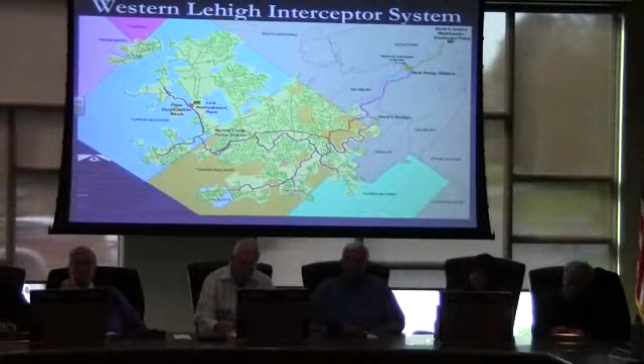Today we're going to first see the presentation on the EPA AO. Presenting will be Jim Shelton, who has been our program consultant ever since we first received the AO. Then after, we will have the 537 plan presentation. We have Bill Bonner, who works for Arrow, and with Bill is also Ralph Eshborn, who works for AECOM and is part of the Arrow team. He'll present the findings for the 537.

But before we actually get to the presentation, I wanted to take a few minutes to go over a system overview, so that everybody understands our system, the board and the public as well.

If you'll refer to the screen, this is the Western Lehigh Interceptor system. This main pipe system is the interceptor system that LCA owns. It takes the flows from all the communities from the western portion of the county to the eastern portion of the county. We also have two pump stations.

This one we use in dry weather and wet weather to bypass this area of the interceptor system. We also have a little relief system that goes from Keck's Bridge down to Park Pump Station, which we use during wet weather. The Allentown piping system goes this way, and the Kline's Island wastewater plant is here, with a direct discharge to the Lehigh River. Our pretreatment plant, for everyone's understanding, is on the upstream portion of the system.

LCA only owns this interceptor system, which has pipes ranging in size from 18 inches to 36 inches. But these are the collector systems, and this is where the actual sewage flow and the majority of the I&I comes from. So flowing into our interceptor is a portion of Low Hill, Weisenberg, Upper Macungie, Lower Macungie, Alburtis, Macungie, and Upper Milford.

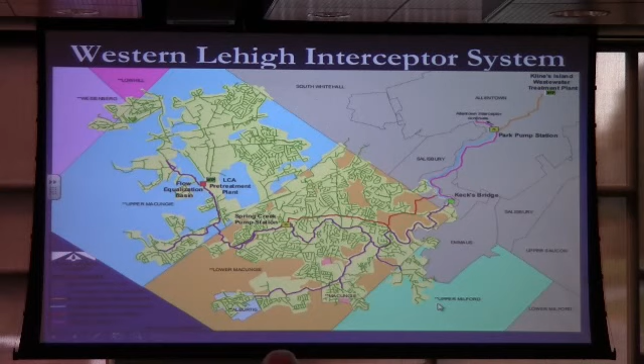So again, the sewage flows come from the collector systems. This is a map showing the findings from our I&I study done in 2009, where we had flow meters in to measure all the individual sewer basins, down to the little sewer basin level. This is basically the basis of all the analysis we have done so far.

The color coding represents a ranking of how bad the I&I is. The reds and oranges are pretty much the worst. There are different ways to do an analysis - this is RDII, another way measured by linear feet. It might look a little different, but it gives the consultants a general idea of where the worst problems are.

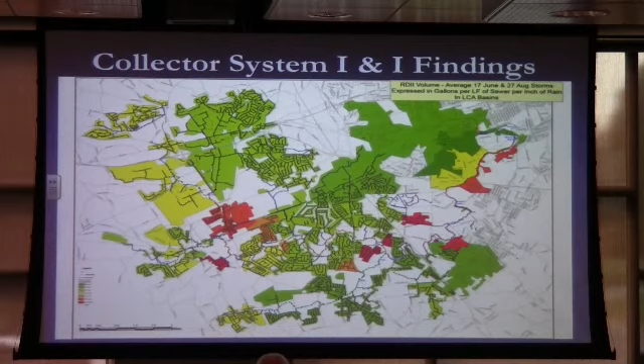This gives you an idea of the sources of infiltration and inflow. Studies have indicated that 50 to 75% of I&I actually comes from private property - homes, businesses in those collector systems owned by the other municipalities. You can get it from roof drains, clean-outs, broken laterals, foundation drains, and sometimes sump pumps in the home - that's on the private side. On the public side, you might have cracks in the pipe, roots in the pipe, and a cross connection with the storm sewer.

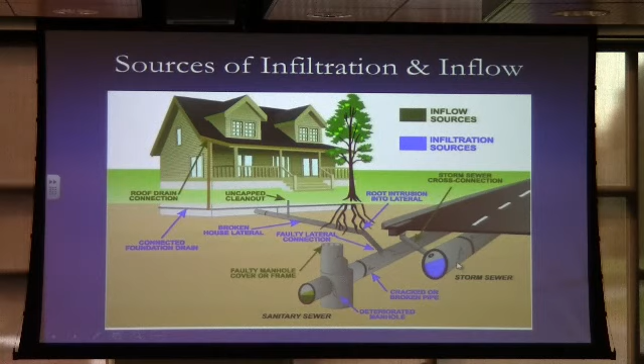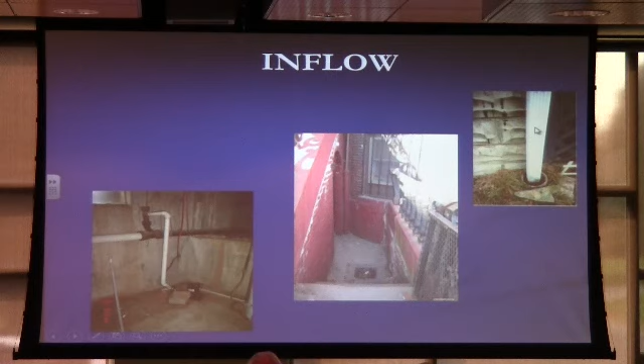This is showing some examples of inflow on the private property side - this is a sump pump drain at the bottom of a basement that goes directly into the sanitary sewer, and this is a roof leader. That's another roof leader.

Inflow: old brick manholes can let rainwater in. You can also have areas where storm water doesn't drain away very well, so that water ends up getting into the sanitary system.

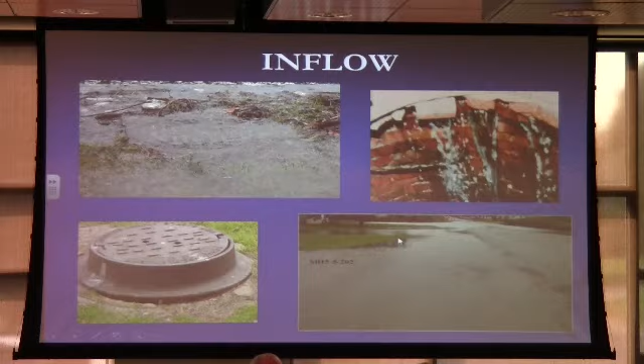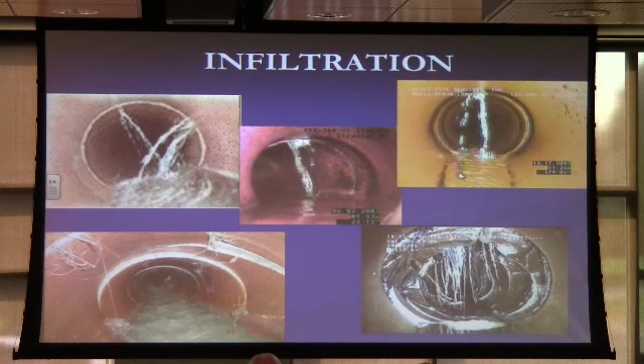Infiltration in the collector pipes can come from leaking joints, broken pipe, root intrusion, and other defects that allow water to get in. This can occur in the collector pipe or in the Western Lehigh interceptor. This is just showing some manholes.

You have groundwater getting into the manholes through some old manholes that may leak or are deteriorated. Again, a lot of these issues would be something you'd see in the collector system.

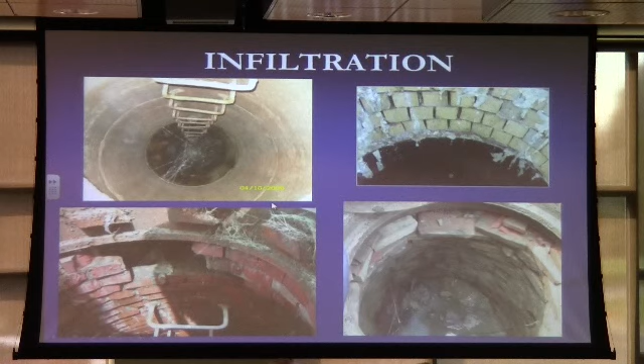Just to let you know what LCA has been doing to the pipe that we own — and again, we only own the interceptor pipe — we've done a physical condition assessment of the entire Western Lehigh interceptor. We put TV cameras in, took pictures, and our consultant did an evaluation. We also inspected every single manhole along the way. In 2016, we will be evaluating the Park force main and the Spring Creek force main.

What we have planned this year is test and seal, a rehab method where we inject grout into all the leaking joints along the pipeline. This will be done in the areas that are blocked off, and we anticipate the rest of the interceptor will get test and seal in another year or so. LCA is actively looking at infiltration in our own pipe system, but all of the municipalities are generally trying to work on their own systems too.

That's where the majority— can I ask a quick question? I know much of the capital budget involves routine maintenance over time. Is there a systematic year-over-year approach for I&I and all these things we routinely do to try to prevent problems from happening?

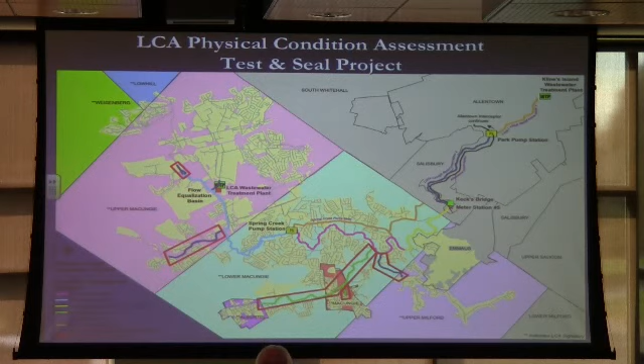One last thing LCA has done: in 2010 we constructed a flow equalization basin located at our pretreatment plant. It holds wet weather flow so it doesn't go down to Klein's Island during a rainstorm — we hold it and discharge it later that day or when the flows have come down.

LCA has spent a considerable amount of money and continues to spend money, and the individual signatories or other communities are in the same boat — they have to try and make improvements to their own systems.

I have a question, Pat — do we have any idea what percentage of the total I&I in the Western Lehigh Interceptor system is coming from the signatory collectors versus the LCA main? We don't have any method of determining that based on flow meters, so there's no hard data because of the way the meters are put in. Experience tells us though that 90+% is coming from the collection system, probably close to 95%.

Think of it in terms of the opportunity for it — we've got 252 miles of pipes in our system, and the Western Lehigh Interceptor is only about 20 miles of that, so the bulk of it is collector lines. In addition, you'd double or triple that for all the laterals that come off. So the vast majority of the footage isn't related to what LCA owns — it's related to what LCA services.

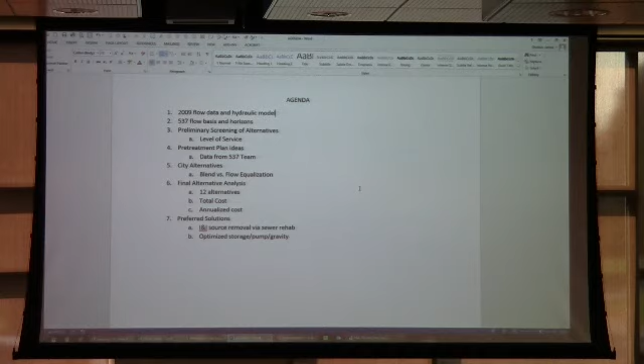While we were doing that, the city of Allentown, who's also party to the AO, the primary party to the AO, was conducting a similar analysis with their team headed by Whitney Reckwine. They built a model, used data from 2008, and developed a phase 1 corrective action plan that looked at 10 alternatives based on 2008 flow only.

They recognized as they started to discuss and collaborate with us that they needed to roll in their future flows. In the course of collaborating with us, getting the 537 flows and moving into phase 2, they now have a model that looks at wet weather flows in 2040 flows. And we've been collaborating with them on solutions.

We're in the final alternative analysis stage now, which breaks out into 3 rounds. We're just at the end of round 2 now. They're at the same point. We've been going in tandem with each other, meeting at the program management level monthly, and with the detailed engineering teams at the end of each round. We have a meeting tomorrow with their engineering team to share results. These are collaborative efforts to make sure that Allentown doesn't go left and we go right.

And we're to the point now where we're actually collaborating in a very synergistic manner right now. All of their alternatives right now are built around what they call bounding studies. Coming out of our preliminary screening of alternatives, we had 2 ends of the spectrum.

One, pound the flow at them - don't do anything, don't hold it up, don't remove it. So that's the high flow. And then we had one that said, hold up as much as possible - that's the low flow. They've used those 2 bounding studies to size what they would need to do at Klein's Island and come up with their own cost estimates. I'll show you what those are in a minute.

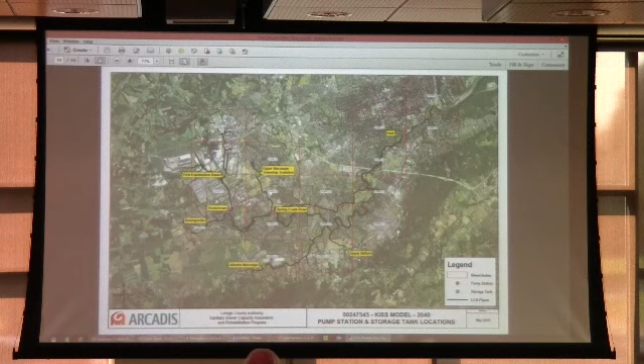Do you have a time you want to break? Or do you want to finish his? Yeah, we're going to continue to the end. Go. Yeah. Good? Okay, we'll leave later. Okay, okay.

Just a figure - this, I didn't know Pat had her figure, but I think everybody knows where everything is. We built 12 alternatives. And actually, I'm going to show you a different sheet real quick. I'm going to go over my cheat sheet first.

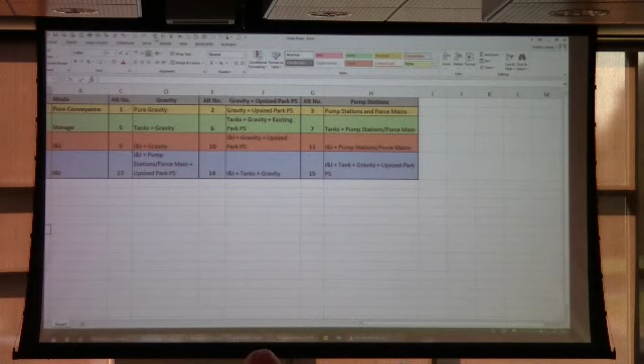Okay, so 12 alternatives in our final alternative analysis. They broke out, as I said, into these modes. You've got a pure conveyance series of alternatives. You've got, that's the yellow, you've got what's primarily a storage piece that looked at storage first, and then what we needed to do to convey what couldn't be stored. And then the orange and the blue are I&I driven pieces.

I should say, let's go get the leakage in the system first. And then from there, figure out what we need to do with regard to storage, pump stations, force mains, gravity lines, that type of thing. So those are the 12 alternatives we have.

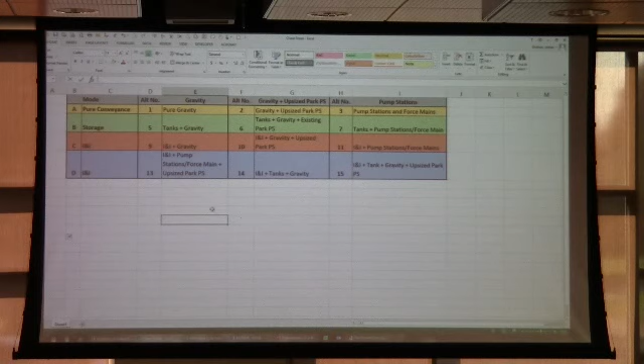So just to start putting things in numbers, I'm going to put up a cost sheet for you in a minute. But in round numbers, the total cost of that solution is $228 million. That does not include our portion of the Allentown piece. So just to start giving you some idea of the numbers we're dealing with.

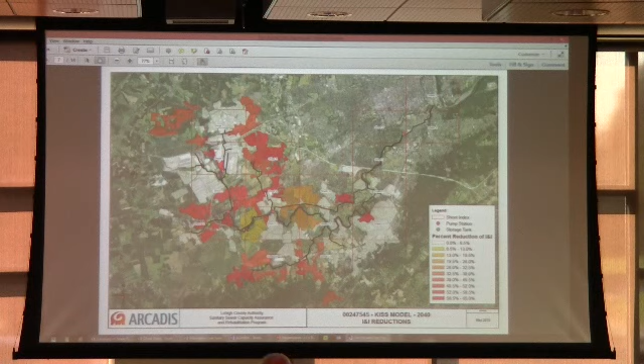This map shows you where the leaks come from and what I&I reductions you might get out of the different first, second, and third priority areas. If you do that, following that same logic, so 9, 10, and 11 are similar to what we had for 1, 2, and 3. It just has I&I reduction in it.

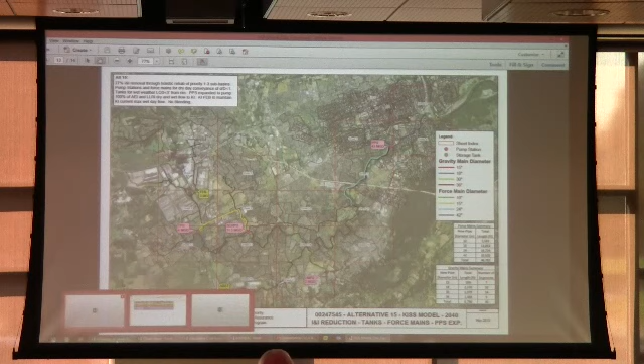And 13, 14, and 15 were all variations on these. Let's put a tank in here, it's a gravity line. Let's put a tank in here and upsize this. Let's put a tank here and a pump station here. So it basically was just playing with each of the little pieces, seeing what changes we could and couldn't come out with. So all of that's real interesting, but the real story here is the costs.

Let me bring this on the screen for you, and explain what you're looking at. On the left side, you'll see your alternative numbers, and you've got a brief description of each one. The yellow ones are the first 6, no I&I removal. The blue ones are the second 6, I&I removal.

You've got the total alternative capital cost. This is your upfront capital. It includes contingencies, engineering, easement acquisitions, permitting, dewatering, shoring, everything you can think of. We've got fairly detailed costing that went into this, but even with that, we still rolled in a 30% contingency. It's the same over all of these.

Some of these alternatives, like alternative 1, are pure gravity, there's almost no operating costs. Others that are heavily capitalized into storage, where you've got to clean the tanks and get that flow up into the tank, and you assume the low grade tank so you've got to have a pump station, there's energy costs. Those have O&M costs that are there. All of this analysis is predicated, while we looked at a 30-year planning horizon, this is a 50-year cost estimate.

Because you're going to bond this stuff for well past 2040, we also included alternatives that were pure gravity or weren't looking at upsizing Park—what would be the cost of putting a parallel line from Park Pump Station to the entrance of Keck's Bridge? That's the LLI parallel, $33 million to run a 60-inch line from Park up.

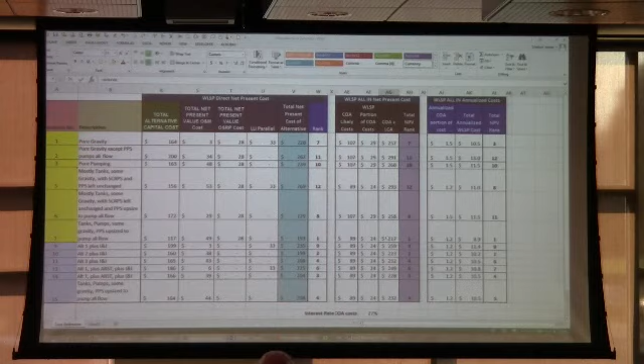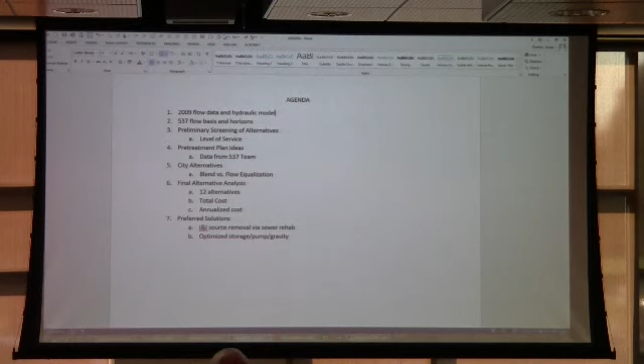Is there, when we talk to the signatories about the 60 miles, who does that? Do we have an arrangement with them? Are they paying it, are we paying it, or is there a conversation?

So, just a step back to 2009, actually before the AO hit, the corrective action plan for the DEP hit—that's where the start came from. We knew at that time that to achieve compliance, we needed to work with our signatories. So we built the Western Lehigh Sewer.

We conceived of the Western Lehigh Sewer Partnership, and the agreement in 2000—it took us two years to negotiate that memorandum of understanding. That took us through basically the first quarter of next year, with the analysis and coming to terms with what the best solution would be and the cost.

We agreed at that point in time, so we had no idea what the cost would be. Nobody wanted to sign on as partners until they knew what that number was. And quite frankly, there was a lot of 'I'm not sure how much we can trust anymore.' We're at the point now where the trust level is high enough.

We met this morning with Alburtis and Macungie, and I asked them what they suggest we do moving forward. We need to get that second memorandum of understanding signed—we have to go through this together. So right now, at least from two of the four principal signatory members, this seems to be working much better as we go through this as a team.

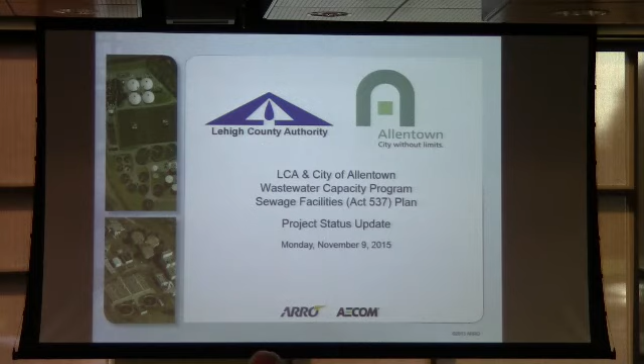ARRO and AECOM have been working on the 537 plan now for years, and we thought it was timely to give you an overview of where we are, with some path forward suggestions for consideration.

So I'm going to take you back essentially 2 years ago, and this was where we were. We were looking at pinning down effluent limits. We've interacted with the DEP and with the Delaware River Basin Commission, the DRBC, so that we know what our goalposts were that we had to get over.

And then we were developing present worth of alternatives, starting with this set. This, in November of '13, was our understanding. Here you see the 4 alternatives that were identified to take a 4 million gallon expansion to Kline's Island, and then 3 direct discharge cases: land application, discharge to Jordan Creek, discharge to Lehigh River, and CapEx, capital expenditures required, OpEx, the operating or O&M cost, on a present worth basis.

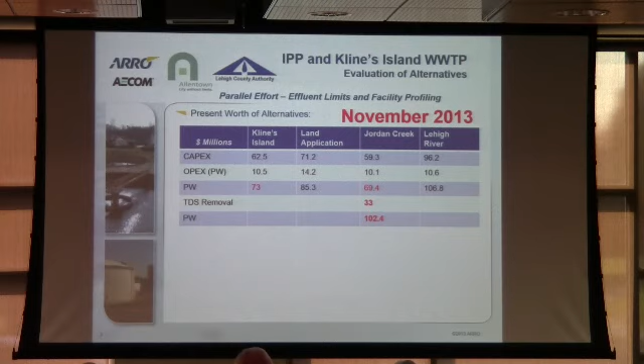high levels of TDS in the industrial pretreatment plant, or IPP, discharge. And that had changed the ballgame, as you probably recall, for Jordan Creek, where there was a strong concern there was direct communication between the creek and the drinking water supplies. Therefore, the TDS had to be removed to meet the secondary drinking water standards, federal standard of 500 milligrams per liter. The only way to do that reliably was to add reverse osmosis.

It's a very capital and operating intensive step. So what was, from a present value standpoint, the preferred alternative went to one of the least preferred choices. That was $102.4 million of present worth, and it's up where the Lehigh was at 106.

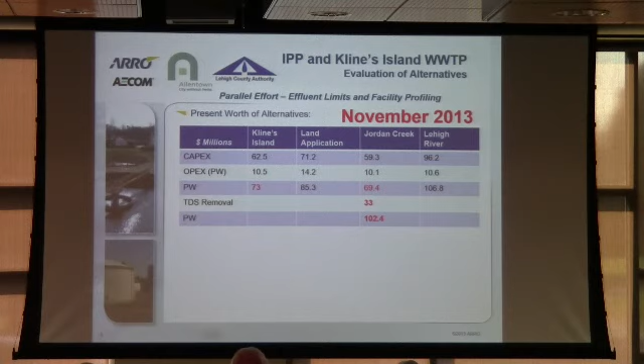And the front runners then became land application and Kline's Island, of course. Our goal at the time was to, in effect, make each case all it can be, optimize it as best you can, let the chips fall where they may. So that was our chart.

And our path forward at that time was to deal with these uncertainties. Kline's Island looks fairly attractive in this analysis as of November of '13, but there was a concern that the advance cost, which was included and estimated at about $12 million of capital cost, was low. You've seen the kind of numbers that Jim's reviewed with you, so you can see where that concern comes from. And so that required study.

And then we saw at the time a substantial cost reduction potential for land application that might be reduced by as much as $20 million. As you recall from the presentation last year, that had to do with adopting the Penn State living filter approach as opposed to an approach that required a lot of storage, or you had to do drip irrigation, which had its own issues.

And then, having recognized that TDS was such a big concern for Jordan Creek, we wanted to make sure we considered the impact of total dissolved solids on land application, and at the same time investigate through source control or lime softening. Lime softening dropped out pretty quickly, but through source control, is there a way to reduce this TDS so we don't have quite the issue that is presented for Jordan Creek? And then take a look at how we might further reduce, make each case all it can be, through new technology or perhaps a hybrid approach.

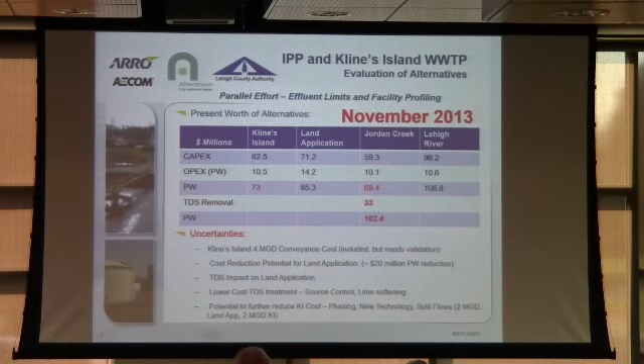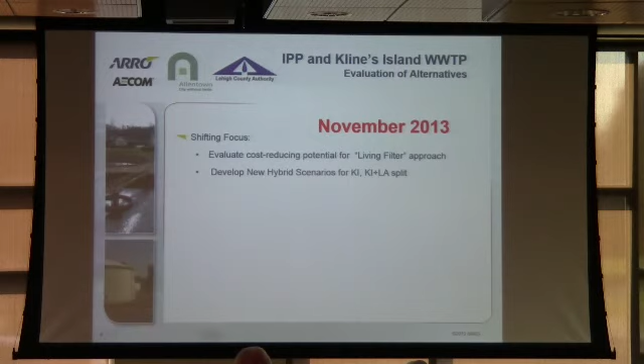So, shifting focus at that time, we took into account the living filter, and we're going to look at these hybrid scenarios. We've got to evaluate the TDS on land application and develop the Kline's Island model.

Here, in somewhat of a parallel to what Arcadis did, it takes a lot of effort to develop a calibrated model. That's what the 150 flow meters were for the flow system. We have tools we can use for a treatment plant to get that level of calibration. Once you've made that investment, you have a very powerful tool, because if we have 95% of our effort in, we have little to show for it otherwise.

Then with a calibrated model, we can start running simulations and look at a lot of alternatives. So that was our strategy for Kline's Island.

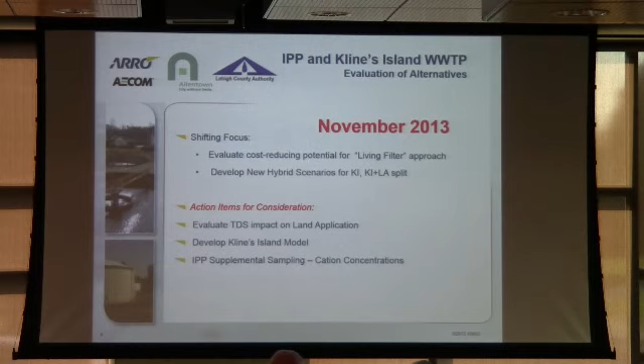And then we came back and worked closely with the staff to get more data on the cations I referenced here, cations being calcium, magnesium, sodium. What was the makeup of this TDS that we were wrestling with?

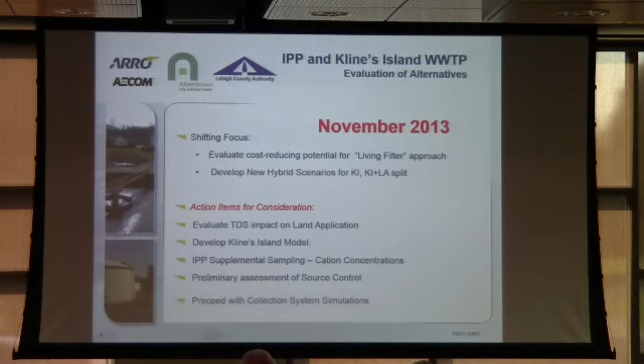And as I've said already, get into source control, and look at how we could characterize where it's coming from. Can we do something upstream to control it? And proceed with the collection system evaluation.

So let's take a quick run through TDS, since it's sort of the 500-pound gorilla in the room here. We've had a number of sampling events. We were first alerted by looking at historical data between 2009 and 2010. At that time, we saw a steady increase.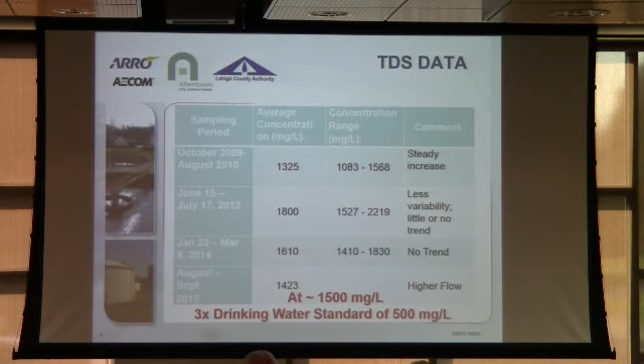I think at the time you were ramping up your industrial sources, and it went from around 1,000 milligrams per liter up to a little under 1,600. Subsequent studies in '13, '14, and '15 pretty much confirmed there's no continuing trend, it's leveled off, but it stayed at this 1,500 level, which is 3 times the drinking water standard of 500. So that's the challenge.

So when we look at TDS, levels greater than 1,000 milligrams per liter compromise agricultural use. For land application, because we wanted to move forward in parallel, we assumed we could be successful with the source reduction program to at least bring it back down to 1,000. By the way, normal domestic sewage is 200-300, maybe. So you can see the unusual nature of the effluent coming out of the IPP.

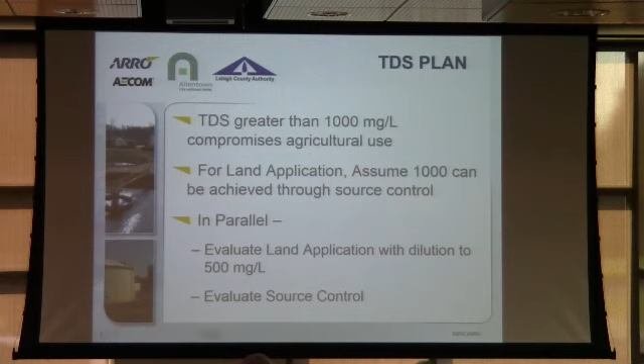So in parallel, we're going to look at the land application approach that would provide dilution of what we land apply down to 500, and evaluate source control.

So with that as a backdrop, I'd like to give you a quick review. We did cover this in the past board meeting, but let's go over where we are with the land application studies.

This is the Penn State Living Filter, and its primary virtue is that they can apply year-round. Here we have a nice winter wonderland shot we showed you before, where they're actually doing spray irrigation in the dead of winter, and you get these nice ice formations on the vegetation. But the program is very controlled—you're controlling runoff, you're prepared for snowmelt, and so forth.

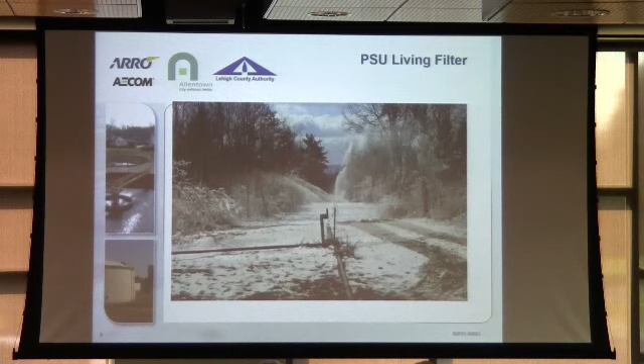And it's been in practice for 3 decades now, heavily regulated by the DEP. So we're looking at a known approach. The interesting thing is that the geology of the Happy Valley area is similar to the geology of this area, so we saw a strong parallel there.

Just another shot of the winter application field. As you recall, we actually had Dr. Parizek present when we presented to the board last time. Dr. Richard Parizek is the granddaddy of the program—he's been involved for all 3 decades. He's a professor emeritus at Penn State, and we engaged him to examine the potential for land application here.

And the starting point was that there was a preliminary study done by Castle Valley back in 2012, and... maybe not. Is that there? You see that? No. There it is, okay, so I got a little arrow.

This is the pretreatment plant, the IPP. Castle Valley looked at a 3-mile radius to minimize the cost of conveyance to the land application site. They were looking for sites close to the IPP and identified 8 potential sites within this 3-mile radius, ranging from 107 to 229 acres.

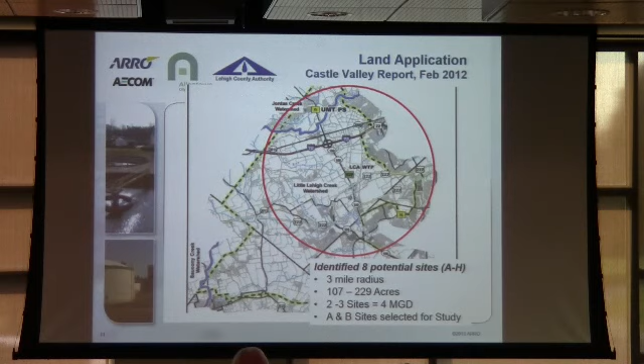The thought was that based on typical land application rates, 2 to 3 sites would give you the 4 million gallon expansion we're looking for. With Dr. Parizek, he reviewed the data available at the time and identified 2 sites, called A and B, out of this group that were selected for further study on his part to see if the Penn State Living Filter approach would apply.

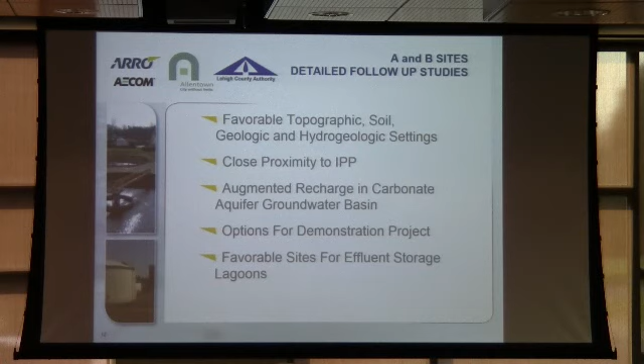So here are his observations, again harking to the parallel between Happy Valley and here: favorable topographic, soil, geologic, and hydrogeologic settings. Of course, they were selected to begin with proximity to the IPP. You do have augmented recharge in the carbonate aquifer, which is parallel with the Penn State application. And there were options for a demonstration project in this mine and favorable sites for effluent storage lagoons.

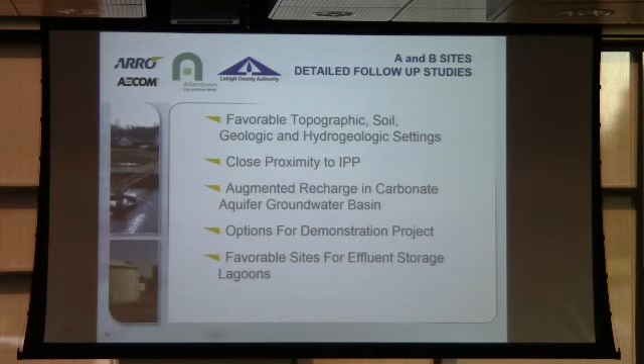The year-round application minimizes your storage requirement, but doesn't eliminate it. And even though the carbonate rock is actually favorable for this form of land application, you don't want to put your storage on it because if you get a sinkhole, you've got a big problem. So he actually identified outcrops of rock where you can put the storage to tie in with the carbonate. Very thorough. I think you all probably saw that when he presented the last time.

Now, the benefits of spray irrigation: it's less costly construction than the buried lines that were originally scoped by Castle Valley. It allows agricultural activity, which can turn some of what we might think of as pollutants or contaminants and nutrients in the wastewater into beneficial reuse, because we can use that nitrogen.

The spray line schedules can be adjusted to manage storm flows and control runoff. That's all part of the active program and protocols developed at Penn State. You get more uniform distribution, less chance of overload, and you can also preserve open space. A lot of what they do up there isn't just agricultural - they've got some wooded areas that you saw in one photo, so it's a way of preservation as well.

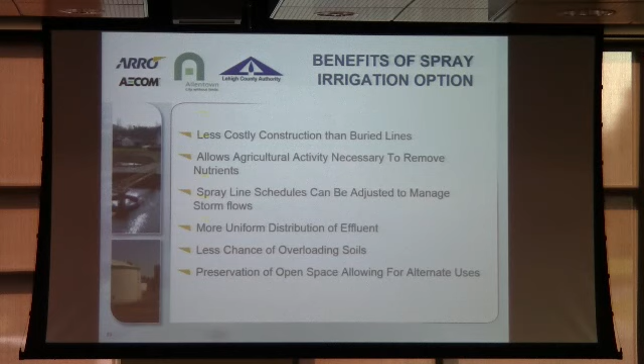So the constraints: we're trying to get a full expansion capability here of 4 million gallons, and we do have the high TDS, anywhere from 1,500 to 1,800 as you saw recently, and we've got the requirement to meet the 500 milligram per liter drinking water standard. There's also a nitrate limit, although this was an issue at Penn State, but we think it's less so here based on how we would upgrade the treatment plant to do this.

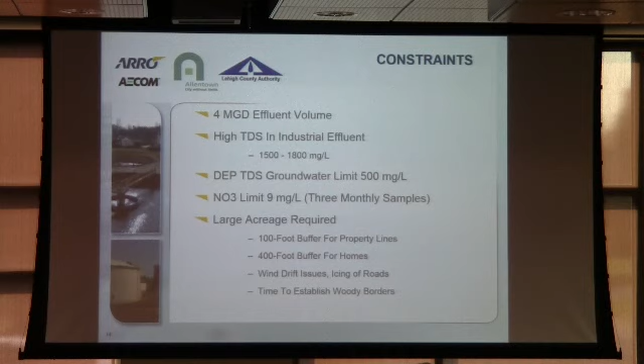There's large acreage required compared to drip irrigation because you need buffers. You're really spraying now, you've got aerosols, so you need a 100-foot buffer on property lines, 400-foot buffer for homes. You've got wind drift issues, potential icing of roads, and preferably in a fully developed program you want to establish woody borders - these are windbreaks, and they help with the application. You do need some storage in wet weather, and probably this one should have been highlighted because it's first among equals here - you need deed restrictions to address groundwater use.

The control points for this, the compliance points where you're going to have to meet the 500 milligrams per liter, is going to be any place where you've got a gaining stream - in other words, the groundwater is now coming out, and that's a measurement point. Or it's going to be a well. And the wells kind of pepper the areas, so you've got a lot of control points potentially. When you're working this out, you're going to have deed restrictions so additional wells aren't put in place, because that would be a control point that would change the ballgame.

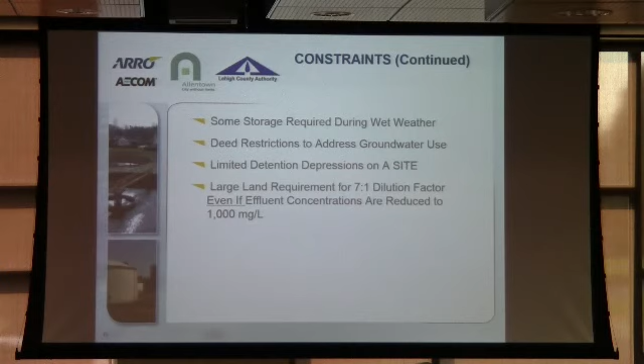And because we established this 1,000 milligram per liter goal, a reduction from 1,500, we still have to get from 1,000 to 500, and that requires a 7-to-1 dilution factor. That may seem strange, so I'm going to take a minute to explain that. That's the controlling figure, and that's what makes this program so much different than the state program.

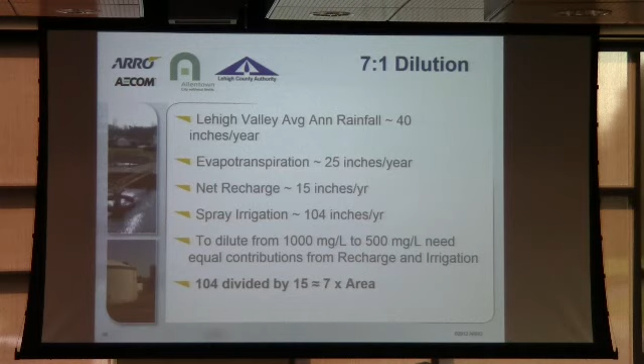So how do we get to the 7-to-1 dilution? The average rainfall in the area is about 40 inches a year. You get about 25 inches of evapotranspiration, so your recharge is only 15 inches a year - this is on an area basis, of course. And when we do spray irrigation, we're applying 104 inches a year, 2 inches a week. So to dilute from 1,000 to 500, we're going to have 7 times the area that we need for the direct application. Well, this is why we brought Dr. Perzak in to work with this in the specific sites we had and see what we come up with.

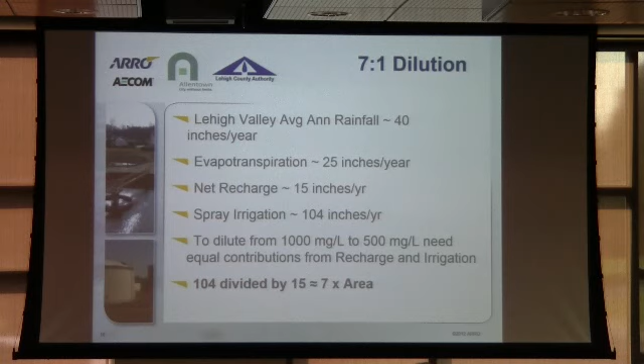Okay, so some of the thoughts about the two sites that Dr. Perzak studied - the A and B sites have domestic wells located along the boundaries.

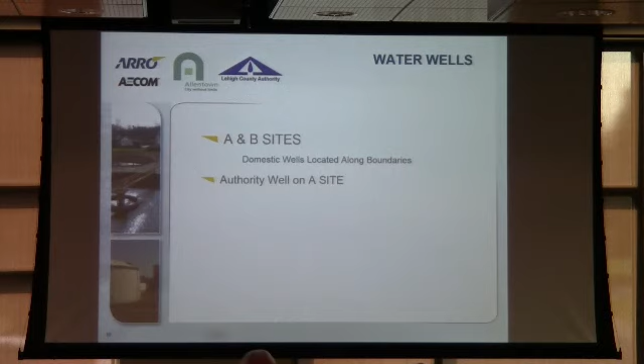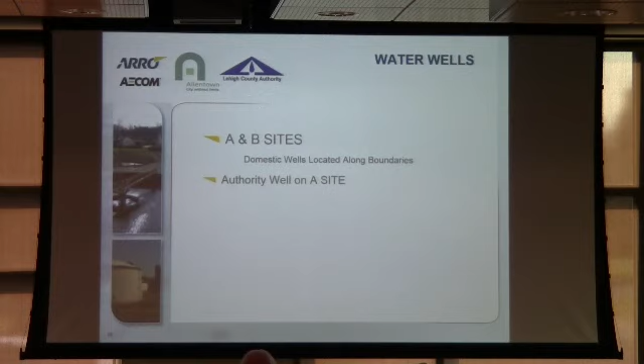Those were control points. Interestingly enough, the A site had an authority well, a Lehigh County authority well on it, a production well, which had some interesting aspects. That's where we thought we could do the demonstration site, because the cone of depression would keep everything there. That made the DP happen.

So the site and the contiguous area for the A site are a little over 500 acres, and then the land north of the site, the surface water divide. You can think of, you see a drainage basin map, you can appreciate what we're talking about here. We're really looking for this recharge to all flow into the area we want. So as long as we have those deed restrictions, we don't have to control those properties, but we get the benefit of the water coming in.

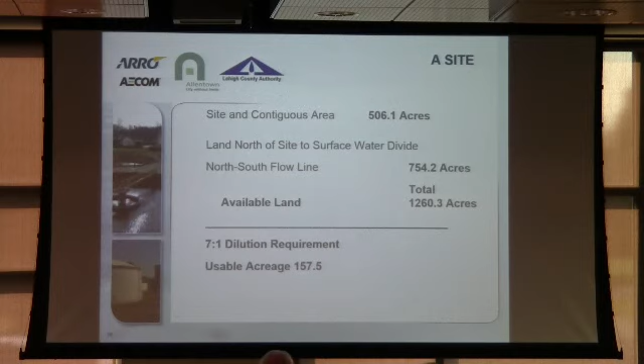So in this A site, there was a rather attractive additional 750 acres. We had a total of 1,260 acres, and so with a 7-to-1 dilution requirement, the estimated usable acres was 157.

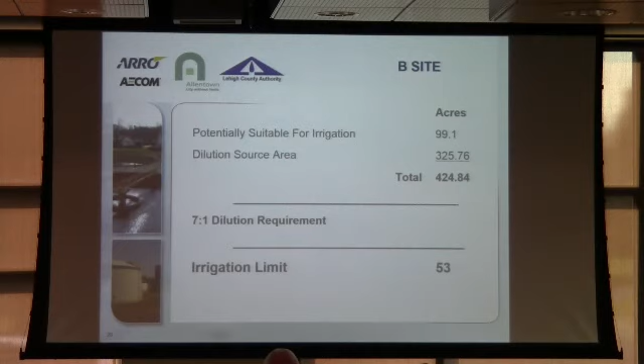You can do the same thing for the B site. Here we got 424. So with the 7-to-1 dilution, we got an irrigation limit of 53 acres. Here, there wasn't as much recharge that would flow in, some upgrading of recharge, so it was a more restrictive situation. So now just a little math.

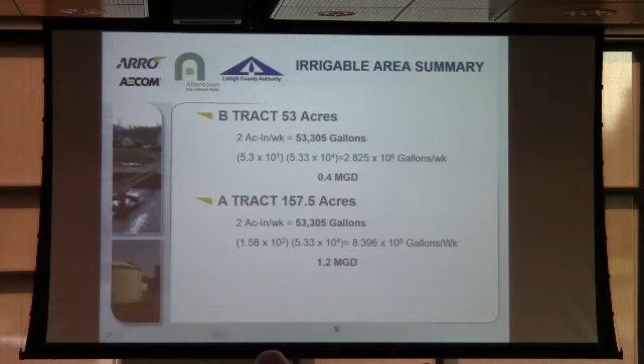We got 53 acres for the B site. You apply 2 acre inches a week, and that works out to 0.4 MGD. For the A tract, for the 157 acres, we're 1.2 MGD. So the implications of that were that we didn't have, at least with the initial sites identified, we didn't have the potential to do 4 MGD.

However, we were interested, if you recall, in looking at hybrid approaches where we might do a program to defer investment in a more costly approach. And so we said that there was some additional area that Dr. Parizek didn't have a chance to characterize on the A site, but he said if we had that, we could be up around 1.5 MGD instead of 1.2. So let's be optimistic just to see what the case could be.

Let's use the 1.5. And we have a reference number here, and I'll get a little more into what we're looking at for Kline's Island, but the capital cost, these are dollars per gallon of expansion. So we're going to do 4 million gallons per day of expansion. So that works out to about, to do the upgrade that we needed at Kline's Island to take 4 million gallons, works out to about $8.65 a gallon.

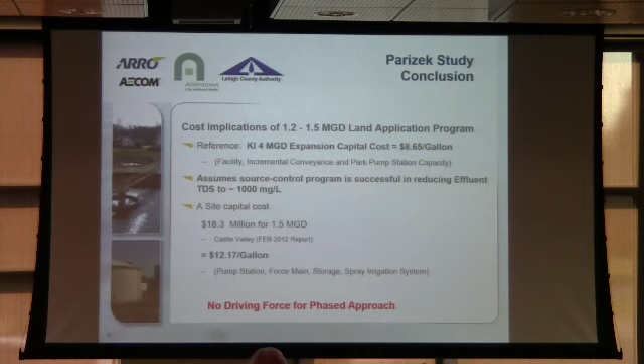Here we're going to assume the source control program is successful. We're down to 1,000 milligrams per liter. We can use Dr. Parizek's numbers, and still the cost, based on Castle Valley's estimates, comes out to $12 a gallon. So we didn't see any driving force for a phased approach with the information we had at that time.

And this brings us up to where we made the presentation to the board a little less than a year ago. The staff, and Carl in particular, identified that there was a lot of opportunity to the southwest.

The advantage of this is, and actually this was some guidance we got out of the board when we did make the presentation to you, that the concern over the A site, which was the favorable site for the first analysis, is it might be prime development land, and therefore the cost of leasing or acquisition or the ability to hold it long term was compromised.

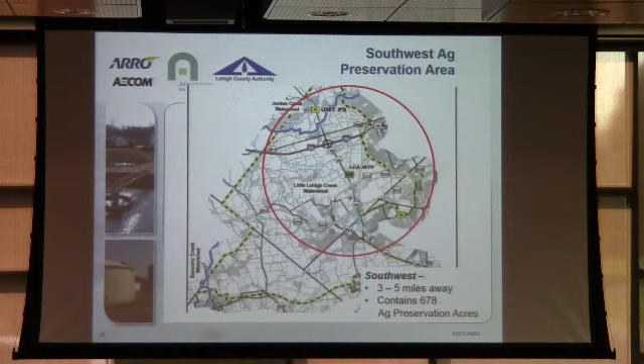And so the ag preservation approach is very attractive because this is dedicated now. It's a deed restriction that it has to remain in agricultural use. And therefore, lease cost or long-term access would be much easier.

So now we're getting up to more recent studies. We have 678 acres identified, but the problem is we need more like 3,500 to 7,000. And the 7,000 number comes if you can't reduce the TDS, because now you don't need 7 to 1, you need 14 to 1. It's pretty straightforward math, but you can see what happens. Plus, we're compromising the agricultural potential.

So this looked like a pretty challenging aspect. And then, of course, we're twice the conveyance distance now. We're out instead of 2 miles, you're more like 4 miles just to get to the site.

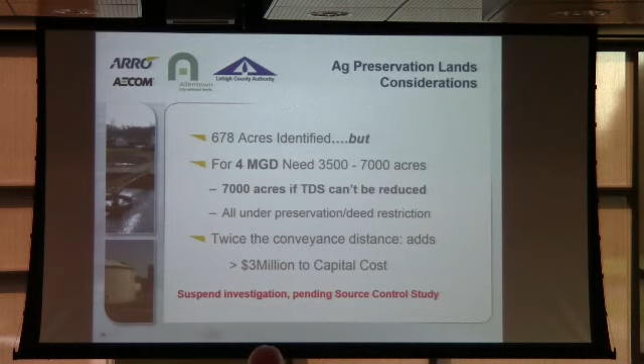That adds an additional $3 million to the capital cost. So the tentative conclusion is we should suspend investigation pending the source control study, which is where we're going next.

But before we leave this, so the significance is appreciated, we've got that original 3-mile circle here. You need about a 2-mile circle even if you have 100% availability. So I'm not really allowing for buffer zones and so forth, but that's the area required with 100% availability if we're really at that 14 to 1, and we need not 600 or 700 acres, but 7,000. So you can see it's a daunting challenge. All that has to be under deed restriction, and that's a very optimistic approach since I'm assuming 100% availability.

That's the county line as well, right? There is a county line here, yes. So we're down into Berks, I guess.

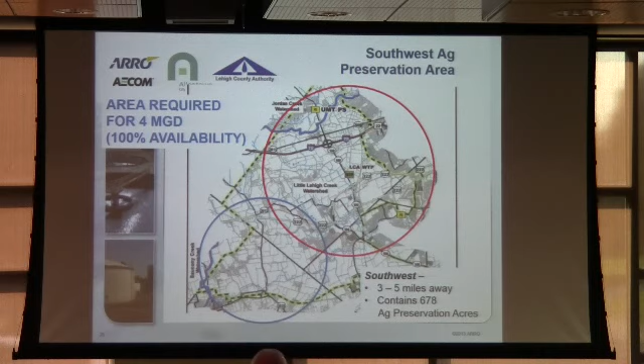So source reduction was the right idea because we can pinpoint this. We're not going to have to go to every household and ask them to do something, we're going to the industries. And we said, we can't do anything with the 53% if we're not going to be able to achieve this goal. So we really could have a narrow source reduction study within the four walls of that industrial source and see what we could do.

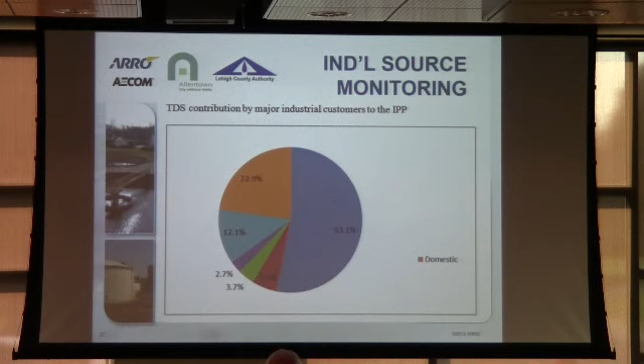So we did that. We had cooperation with them, we were able to get at their data, and we did some additional sampling. I'm going to do some more alphabet soup here, but TDS, total dissolved solids, can be broken down into fixed dissolved solids, FDS, and volatile dissolved solids. And that's important because the volatile dissolved solids are what the treatment plant can treat. The fixed dissolved solids, big salt, okay, just passes through. There's no treatment in the plant.

And so the unfortunate conclusion is that you can't, I mean, it's one thing to ask them to change their softening practices or something like that, but if it's inherent in the processing, the only thing we're left with is end of pipe treatment, because we're obviously not going to change their operation.

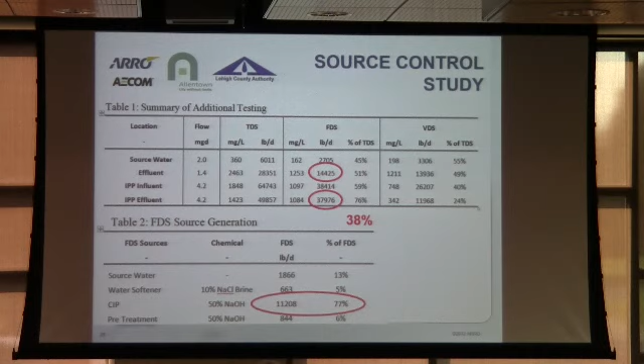So we're at the 1500, that was our basis. So what does that do to us? Low probability of significantly reducing through a source control program. The other thing that we found is, and I didn't have a slide on this, but it's predominantly sodium. So when I say salt, I mean table salt. Okay, it's not hardness, it's not magnesium, it's not calcium. That's why softening wasn't really an option.

And that further compromises land application. Sodium's a bad thing when you're doing land application, it tightens up the soil, makes it difficult to farm. There are ways to deal with that, but again, added cost. And then we also circled back to the DEP and said, because they're actually somewhat pro land application.

It is additional recharge—preserving water as a resource, not just nutrients. But they said there will be no relief from the 500 milligram TDS. That's federal law, that's it.

So the conclusion is that land application would likely require reverse osmosis. That's the same answer we came to for Jordan Creek. The living filter program is a great approach, very applicable to this area for many reasons, but not with the TDS issue—they don't have that problem, and it wasn't a consideration there.

I can tell you from personal experience, this is what's going on in California right now. TDS is actually one of the number one issues because they've had such a drought, and they're really into reuse recharge, but they're actually driving people to reverse osmosis. They actually have basin-wide TDS management plans. We're not quite there yet, but this gives you the flavor for what the implications are.

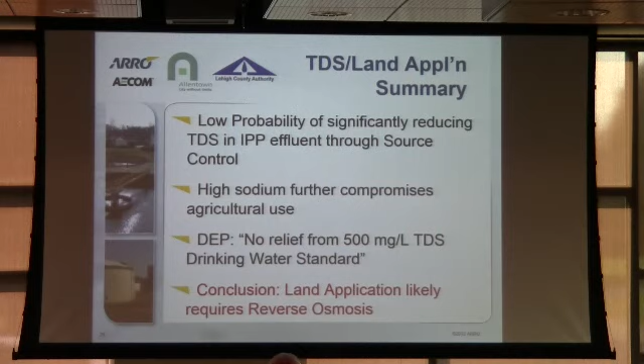Okay, so I'd like to go to the conveyance studies in Kline's Island and then tie that all back together with a summary. Do we have a reverse osmosis cost? Yes, that's coming—I didn't mean to leave you hanging, but I wanted to put it in context first.

The difference between this and our previous presentations is that we kind of focused on a topic area each time, and you'd only see one piece of the puzzle. So today was an attempt to cover all the pieces and then put them together for you, or at least for your consideration.

So now we're going to tie in with all of Arcadis's work. Jim already talked about what our basis is, which is a level of service criteria—this is where we don't have sanitary sewer overflows, SSOs, and we're out in 2040. So we're working together to put this together.

As Jim mentioned, there are really two modeling efforts: one by Whitman Requardt for the city, and one by Arcadis for the LCA system with the signatories. However, Arcadis put together a very valuable tool from our perspective, from the 537 perspective. They put together the KISS model, which stands for Kline's Island Sewer System—and it's not just KISS, it's keep it simple, of course.

But this is a very powerful tool now because our job is to look at the full system. Rather than having to deal with two modeling teams that give both boundary conditions we need to see in simulations for 537 evaluations, we could work with one model. And as you've seen from Jim's presentation today and previous presentations, the modeling effort has continued to get more and more refined. We waited for a while to have it get to a point where the level of precision is sufficient for what we need to do to evaluate the 537 alternatives.

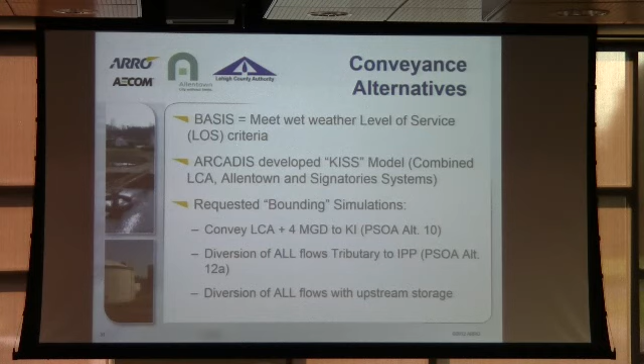So we did look at a storage case as well, just to see what its impacts were.

Okay, so you've gotten quite familiar with these maps, and this is an Arcadis work product of what we requested for our conditions. Here you see what was called alternative 10 in the preliminary analysis of conveyance only. We're only going to look at conveyance, but we're going to take everything to Kline's Island, and that required upsizing 825 pipes, color-coded by size. It's the same approach that Jim showed you already.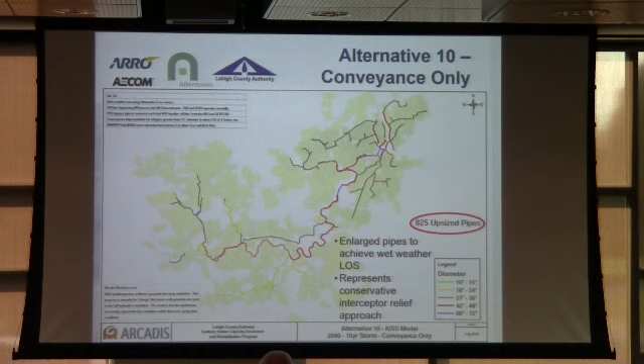And then we looked at this full diversion, and again, this is not just diverting a 4 million gallon expansion. It's taking all flows to the industrial pretreatment plant and taking them to the Lehigh River. With the TDS issue, there's only one place you can go, actually. You need the volume of the Lehigh to get below that 500 standard within a mixing zone. You can do it through Kline's Island, we're doing that already, or you can build a whole separate force main all the way to the Lehigh. So that's what this alternative is.

This is one of the original 4 cases, go to the Lehigh. But now we're going to say, if I'm going to get all those rights of way, do all that trenching - we wouldn't necessarily be trenching - if I'm going to do all that trenching and do stream crossings and so forth, why don't I build a little bit larger line. That's a modest incremental cost, to take all the flows, not just 4 MGD. So that was our basis.

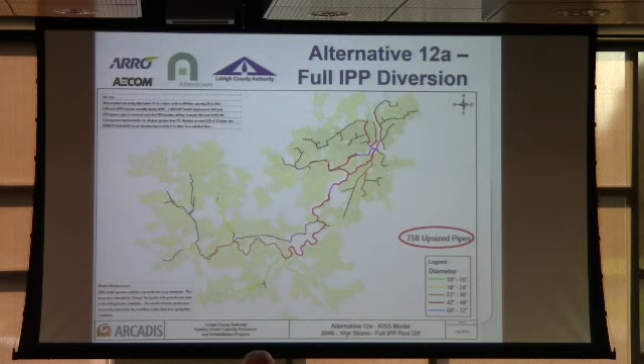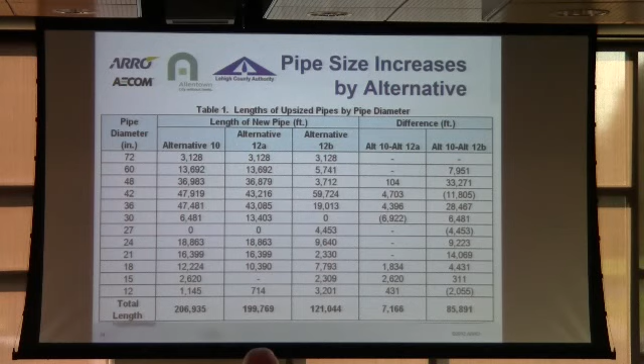And thanks to the rigorous output of the KISS model, we were able to - before you just saw a nice color coding - here's where the detail work comes in. We could take each line, we know its length, we know its size difference, and we can back that up into a cost model. I'm not going to crawl through all this, but that's what this is, where we went through 10 and 12A and 12B, 12B being the one with storage, and we looked at how many linear feet had to be upsized for each pipe size, and then that gave us what we needed to do the estimate.

So what did we find? Full diversion of flow from the IPP will save no more than about $7 million in this piping system versus sending all flow to Kline's Island. The significance of that is that if you go back to what we had 2 years ago, we said the Kline's Island case is looking pretty good, we had $12 million for conveyance, and we were worried it was low. What we found here, this is the take-home point. Frankly, if you only remember one thing, this is it.

The take-home point here is that if we marry the program with wet weather, instead of running separate pipelines, we're doing what Jim has talked about - and he's going to optimize it further - we're taking a 24 and making it a 30. That incremental cost, we call it dollars. It's big dollars, but it's very modest in comparison to the actual overall cost. So we're only looking at $7 million conveyance cost where we had $12 million before. It's actually made the Kline's Island case better.

Now, I talked a little bit about we had one storage case in our bounding conditions, and it changed it. Jim's obviously going beyond that with using all four parameters - source control, pump stations, and so forth. But in all these, since the overall costs are coming down, the actual cost savings, the actual number, that $7 million is going to reduce, not go up. So our bounding analysis still holds.

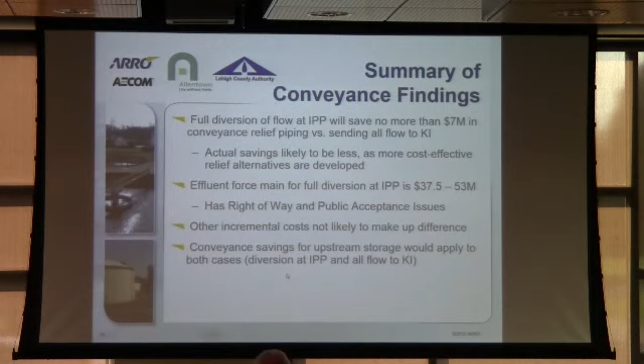So now I've got one more puzzle piece and we can put it all together: Kline's Island. We talked a lot about working outside the four walls here, but part of our charter was to work within the four walls to make each case what it could be.

Here we have a treatment challenge, because going to direct discharge requires a higher level of treatment than you're doing in the IPP today. In the case of Kline's Island, you've got to do an expansion, and because you're doing an expansion, it triggers a tougher standard from DRBC. So we had to work that out.

We identified what that standard is, and then set about with a calibrated model to look at alternatives. Our starting point was that the previous study had identified what I'll call conventional technology, focused more on end-of-pipe treatment rather than changing the basic operation. It's actually a parallel treatment, but it affects the end-of-pipe and not the current treatment system.

We took a look at some alternatives involving more innovative technology. AECOM happens to be pretty much an industry leader in the use of side stream deammonification, so you could accuse me of when your hammer really looks like a nail, but it's a very attractive technology for a situation like this. It does ammonia removal without a lot of chemical cost, it's a small reactor, and it's got a low energy requirement.

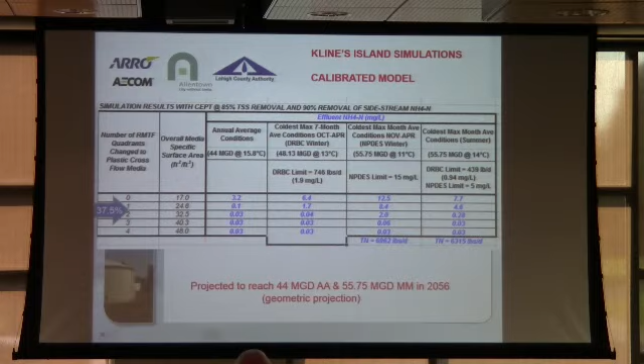So this is what it looks like - this is an aerial of Kline's Island. If you start over on the left here, because we need a small reactor, we got great kinetics.

So right here is that small reactor for the side stream deammonification. Nothing's cheap in a big plant, so it's $5 million. But you can see it's a small footprint, and compared to other options, quite cost effective. We did have to put in for hydraulics, we needed a tertiary bypass here to take some of the pressure off the plant, which the original conventional technology, because it was parallel, did. So we had to address that element.

Over here, this is chemically enhanced primary treatment chemical storage. The beauty of a chemical addition is it has a built-in phasing as well, because the actual capital cost is quite low, and you can ramp your chemicals up as you need them. So a nice compatibility there. And then here we're changing out 3/8 of the rock media with plastic crossflow media. That's where most of the cost is. That's $19 million.

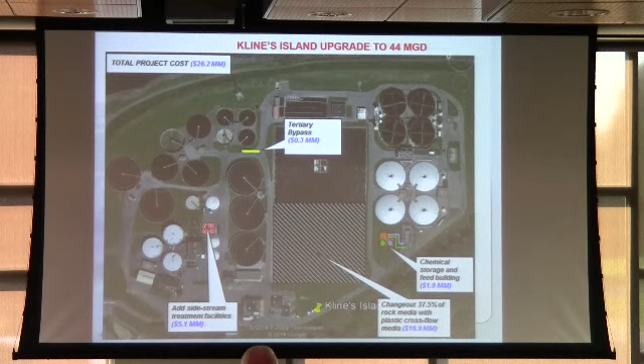So what was the implication of the alternate technology approach? We reduced the estimated capital cost from 36 to 26 million. So opposite making the case all it could be, reasonable success there. We do have the potential for phasing. So if we only did the first quarter instead of the first 3/8, it's $20 million. It's a $20 million initial project, and you can save the $6 million for full build-out for later. And there's no TDS issue. Remember, both of the final cases are going to the Lehigh. This is just going through Kline's Island.

So now we'll put the pieces together. Can I ask a quick question on this? You're not allowed to ask. I don't know. Well, for clarification, sure.

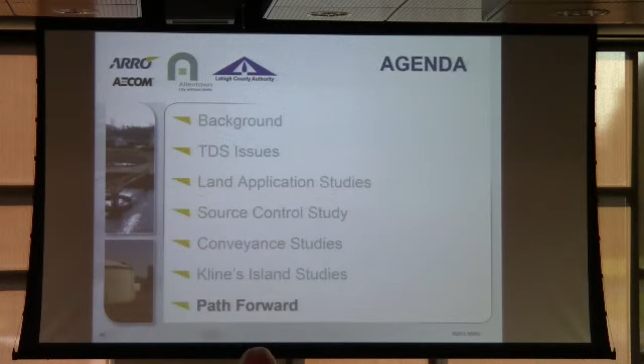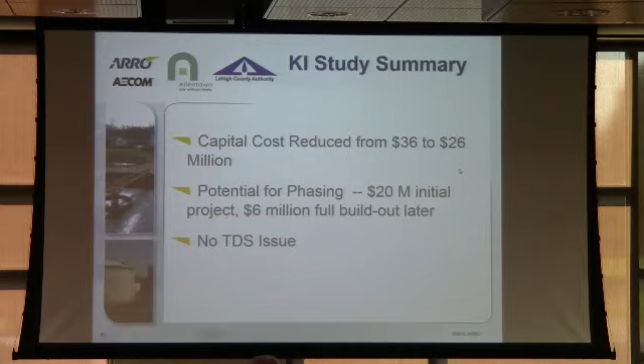This is the Lehigh case where we had the low side of the force main cost, and it's still up at... It's still up, even with a more optimistic estimate for what that force main costs, it's up over 100 million in present value. So the Kline's Island case from just an economic standpoint stands out as a preferred approach.

Now, if I go to the wet weather numbers, remember that I was concerned, or we all were concerned, that in the Kline's Island case, we underestimated this conveyance cost. And what we see here is that when I get to the integrated wet weather program, it's about $30 million cheaper. The answer didn't change even against the best of cases, which is the Lehigh River case.

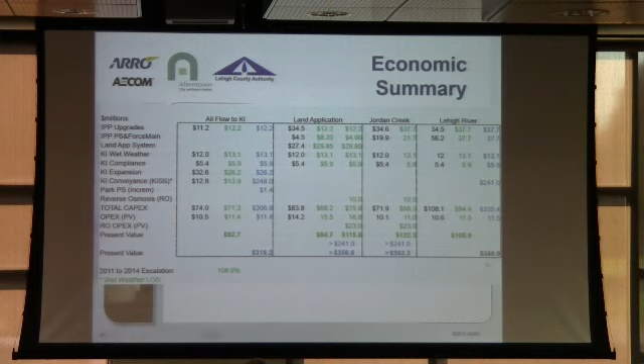So, happy to take questions on that, but where does that leave us? Those are the pieces pulled together from a financial standpoint, our best estimate. The suggestion is that we should defer pursuit of other alternatives other than Kline's Island at this point. We've spent your money studying these things and come to the point where it doesn't look like there's much return on anything but Kline's Island.

However, the number one take-home point is that to get this cost effectiveness, we do want to integrate the program with the AO program, with the wet weather program, and make sure that we get that cost effectiveness in the conveyance capacity. And all these pieces come together sufficiently that we think we're ready for another wave of public outreach to inform the stakeholders and the signatories.

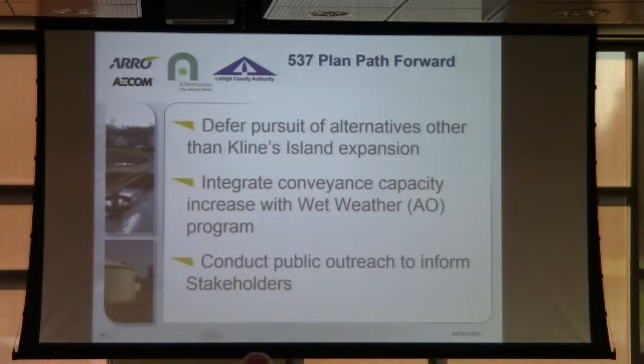Staff has put together a schedule that makes sense in terms of gracefully rolling that out. Of course, we started with what we did today, and get your feedback. We need to, of course, the 537 plan is a joint plan between both the city and the county authority, so we next need to talk to the city. That will be later this month. We want to move quickly with the LCA signatory group and a presentation later this month, with the city signatories in December, and then sometime in the first quarter, hold a stakeholder public presentation.

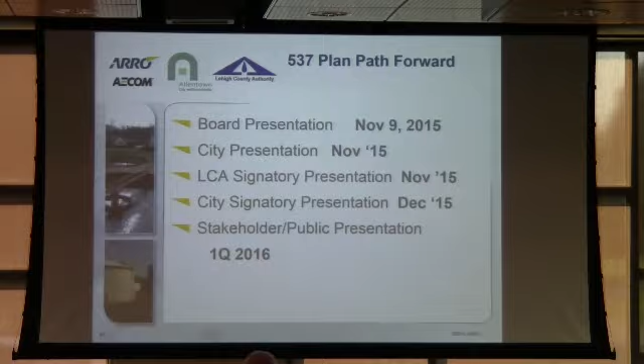Okay. So, very good. Thank you very much.